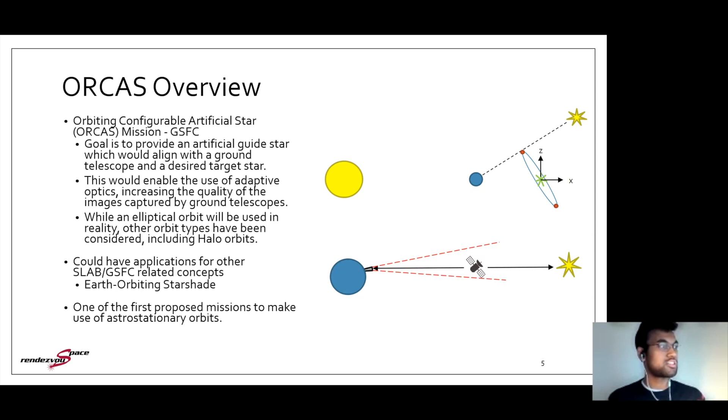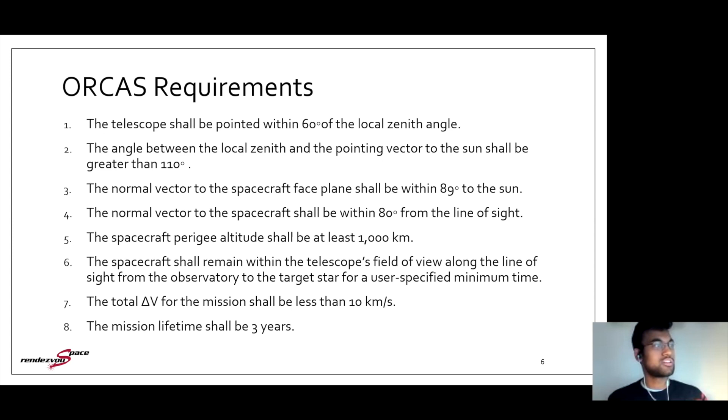So this brings me to my problem statement, which is actually a dual statement. It's first, how can we transfer between halo orbits at the optimal cost over the course of a mission's lifetime, while also viewing the most targets possible along each orbit.

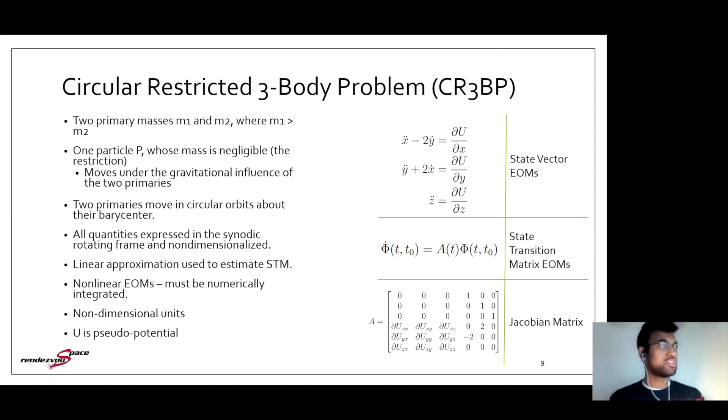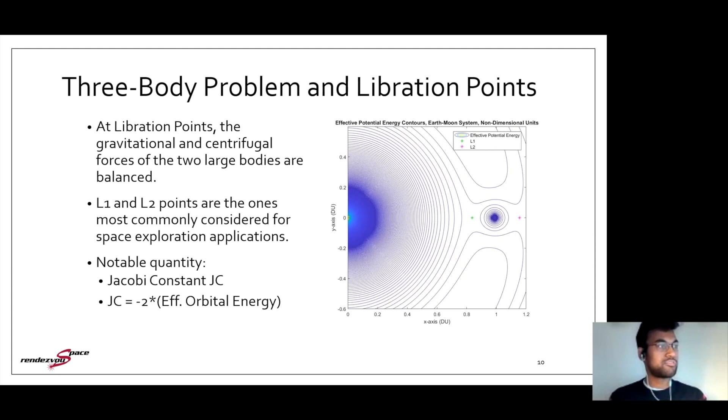But one of the benefits of the three-body problem formulation is it reveals the existence of libration points, which are these equilibrium points in the synodic rotating frame. And the L1 and L2 points in particular, which are seen on this image, are the ones most commonly considered for space exploration applications. And in the case of my work, I'll be using the L2 point. And one notable quantity, just to quickly cover, is the Jacobi constant, which is a scalar of the effective orbital energy of a particle in the three-body problem, and that'll come up later.

Another key concept is the halo orbit family. So there are clusters of halo orbits that form about each Lagrange point. So in this presentation, we'll be looking at transferring between halo orbits within the same family.

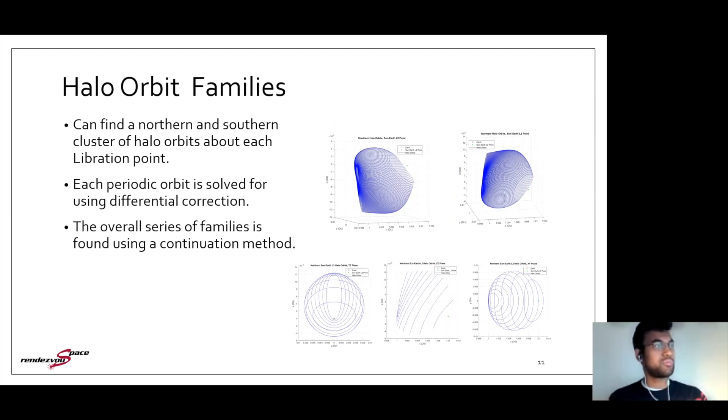And one last background concept is invariant manifolds. So these spiral off towards or away from halo orbits naturally due to the dynamics and can be used to generate zero cost trajectories because a spacecraft can divert onto them just by a small perturbation.

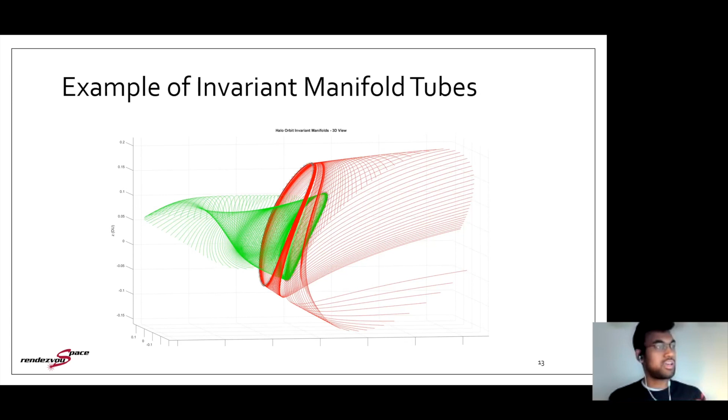And this image shows the manifold tubes emanating from two halo orbits. The green is a stable manifold tube where all those different trajectories are spiraling towards the halo orbit, and the red is the opposite, the unstable manifold tube. All those trajectories are taking you away from the halo orbit. So with that background knowledge covered, we'll now delve into the state of the art.

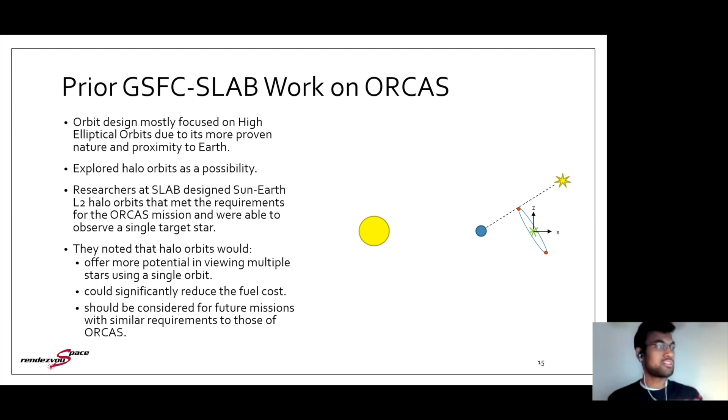As I mentioned, Goddard and SLAB had collaborated on ORCAS and explored halo orbits as a possibility. They did design halo orbits that met the requirements for the ORCAS mission to observe a single target star, and also noted that halo orbits would offer more potential in viewing multiple target stars and could reduce the fuel cost. So they could offer many benefits even if they wouldn't be used immediately.

There's been some work done on halo to halo transfers. Johnson and Howell, as well as separately Gomez, developed different methods to switch between orbits in the same family. And also there's been work done not to transfer within the same family, but to transfer between different libration points or from bodies such as Earth to the libration point using both invariant manifolds and shooting methods.

Then another important method to cover is modal constant decomposition. Modal constants and integration constants are used interchangeably, but I'm going to use modal constants just to avoid confusion with other acronyms. So in SLAB, Guffanti published work on using integration constants as state variables and showed how the variation of parameters method can be generalized and used for applications such as relative orbital motion and multi-agent control.

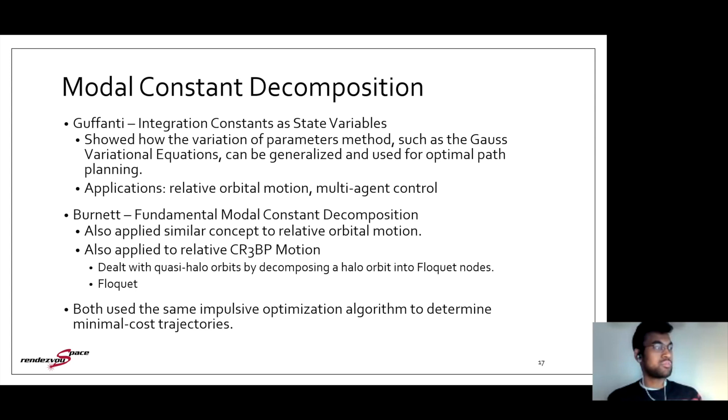And similarly, Burnett at UC Boulder applied a similar concept to, again, relative orbital motion as well as relative three-body orbital motion. But neither one applied it to absolute three-body motion, which is the focus of my work. And both, first Guffanti, then Burnett, used the same impulsive optimization algorithm to determine minimal cost trajectories in MC space.

So now I'll get into my own contributions. I had some initial attempts to find transfers using invariant manifolds, then manual iterations, single shooting methods, and constrained optimization that had some pros and cons. But the most fruitful work I did was adapting that modal constants process that I just mentioned. So there's four main steps.

First, we separate the non-integrable differential equation, so something like the three-body equations of motion, into an integrable and perturbative part. Second, we derive fundamental modal solutions to map the modal constants to the original variables and make the modal constants our new state variables. Then we can incorporate control maneuvers as perturbations and solve for an optimal control path in MC space.

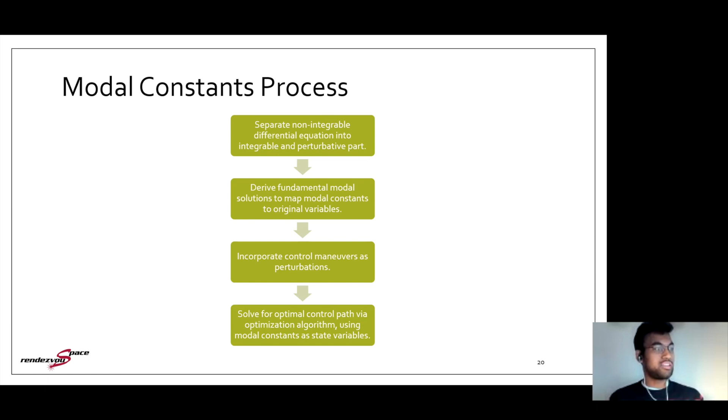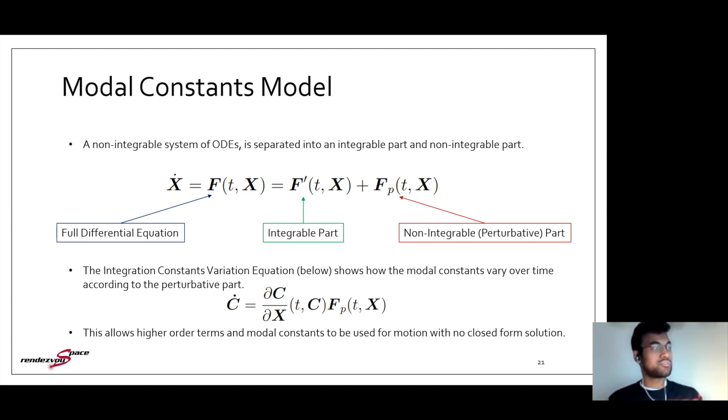So this illustrates that first point where we take a differential equation and separate it into its integrable and non-integrable parts. And then the constants themselves will vary over time according to the non-integrable or perturbative part, which is the ICV equation shown there.

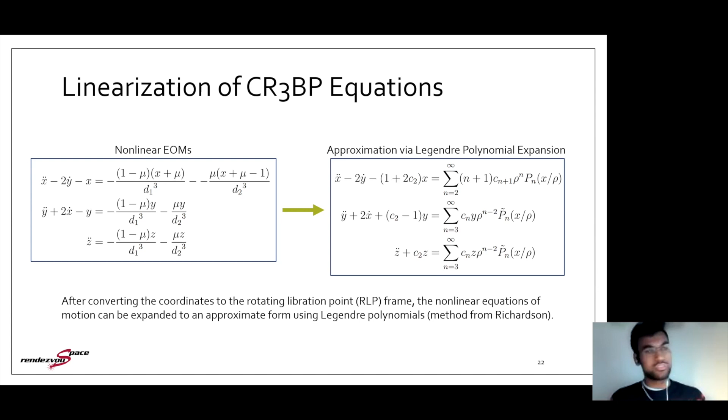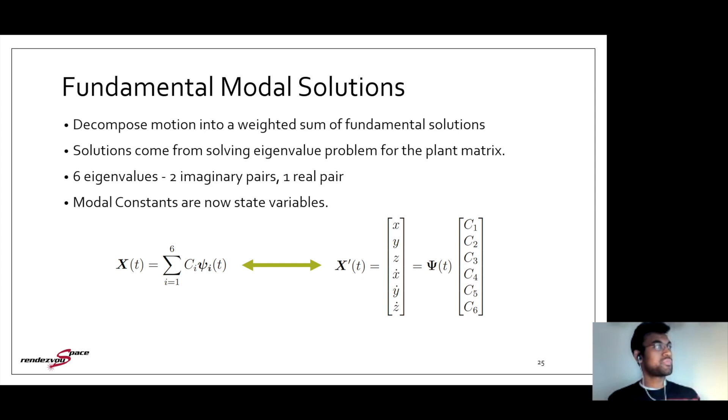So then once we have that, we can decompose the motion into a weighted sum of fundamental solutions by solving the eigenvalue problem of the plant matrix. So we find our fundamental solution matrix psi, and our state variables are now the modal constants, which is the capital C vector there. And there are 6 eigenvalues, 2 imaginary pairs and 1 real pair, and those become the eigenfrequencies.

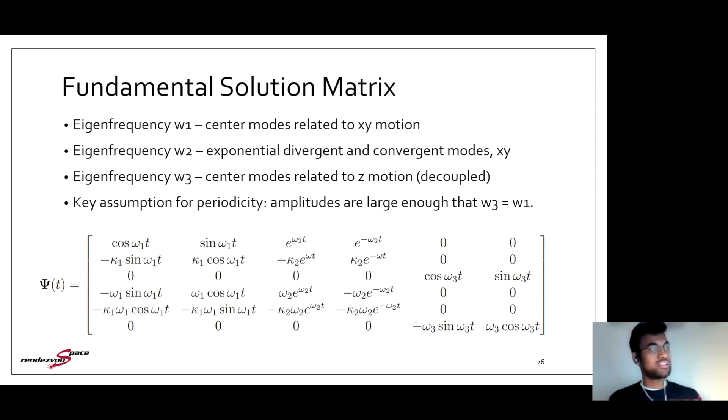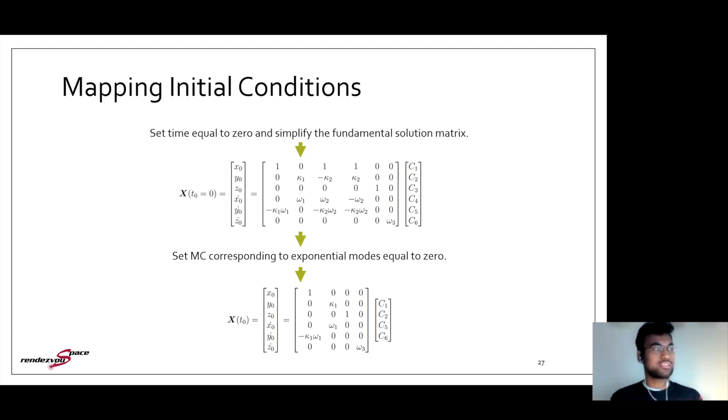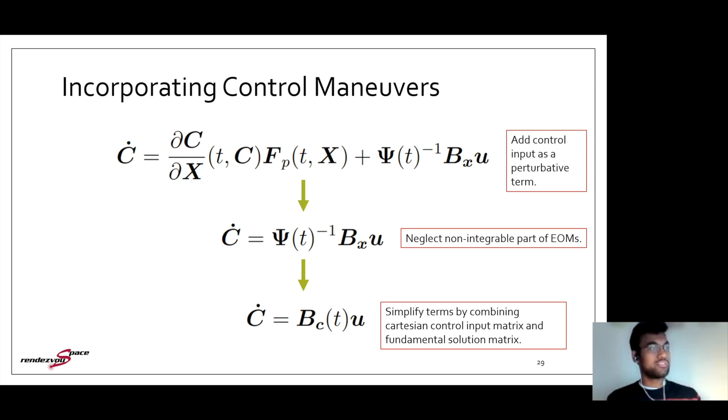So now we can incorporate control by adding it as a perturbative term. And then going forward, if we neglect the non-integrable part of the equations of motion just to simplify it and model it more efficiently, then the modal constants will vary solely under the influence of control inputs, which allows us to use an impulsive optimization algorithm based on the principle that each halo orbit will have its own set of modal constants. And so if we want to bridge the gap between those two sets of modal constants, we can do that using the control inputs while still minimizing our total delta V cost.

And so the optimization algorithm is grounded in reachable set theory, and this is the optimization algorithm that I referred to that Guffanti and Burnett had both used in their works. We have 2 convex sets, one for the control inputs and one for the MC variations, all based on the cost J.

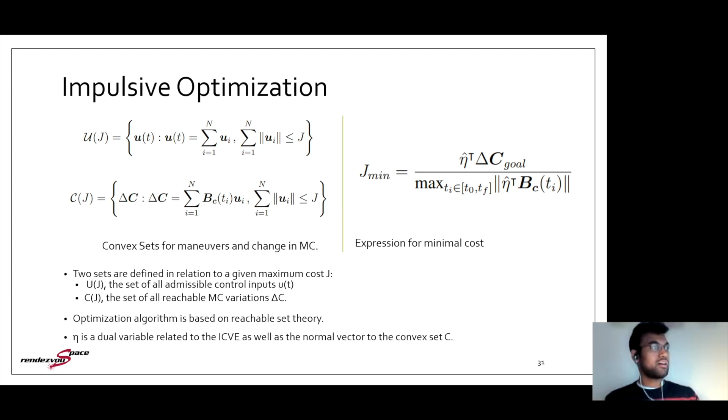And that yields this equation on the right for the minimum cost J, which is a function of the variable eta, which is a dual variable related to the integration constant variation equations, and it's also a normal vector to the convex set C at the point where the goal MC change is found. So the impulsive optimization algorithm itself has 4 steps. First, to solve for that optimal value of the variable eta.

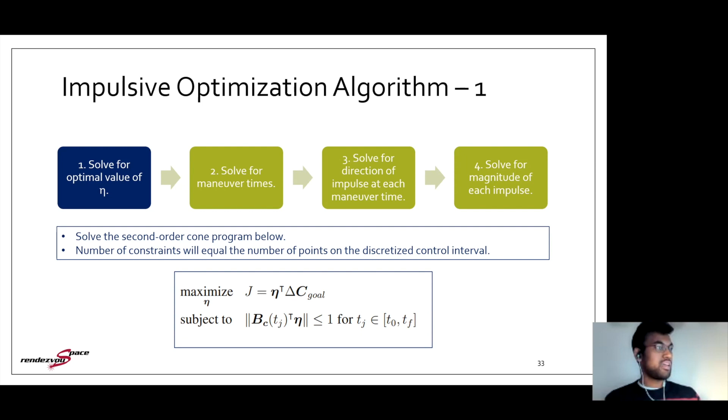Then we can solve for the maneuver times, then the direction of each impulse, and then finally the magnitude of each impulse. So we solve for eta using the optimization setup below; I used a CVX solver for this. And then the remaining steps can just be solved linearly. You don't need optimization software.

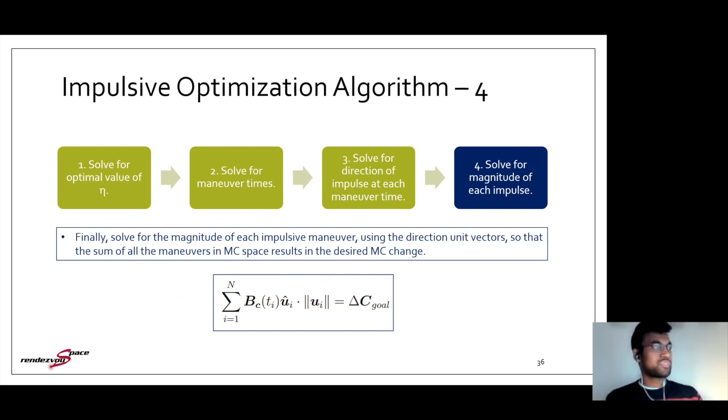And as I said, we solve for the times, then the direction, and then the magnitude. And we end up with the different maneuvers we need to change between halo orbits. So here's just an example of how that would play out, where we have two sets of modal constants. We define a control interval, and we can get the maneuver times and the maneuver cost and sum it all up after using the solver.

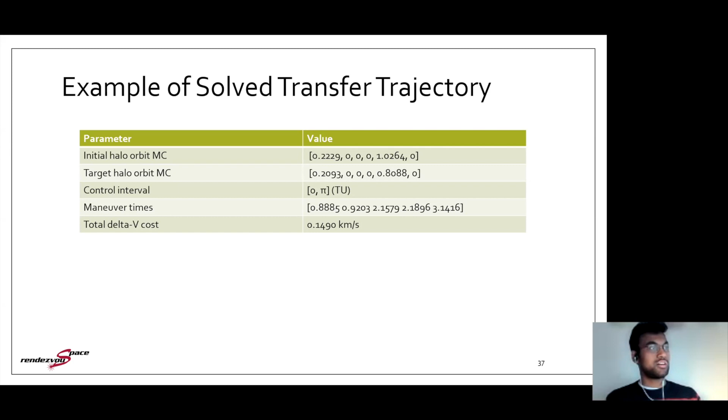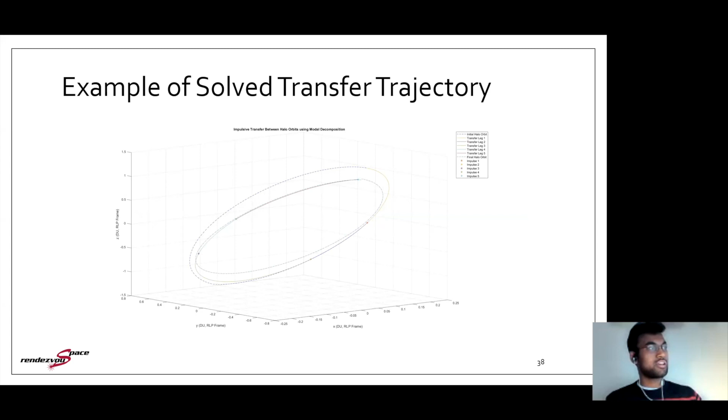Here's what that trajectory looks like. You can see the initial halo orbit, the target halo orbit, and the legs of the transfer trajectory in between, connecting them.

So now, putting the modal constants work on the back burner for a minute, I'm going to talk about another thing I developed, which is a method to find the lower and upper bounds using that Jacobi constant I mentioned earlier. Each halo orbit has its own Jacobi constant, its own effective orbital energy, and you can derive upper and lower bounds for the cost to switch between the halo orbits based on that unique

characteristic. And here I ran several halo orbit transfers through the modal constant solver algorithm, as well as the Jacobi bounds method. And you can see how, number one, the solver is within the bounds and is much closer to the lower bound. So it is doing its job to find a near optimal cost. And more importantly, they follow the same trend, which shows how the lower bound can be used to sequence orbits, even if it won't find the exact magnitude.

And then moving on to a different topic, which is the second part of the problem statement I defined earlier, which is to view multiple targets on a single orbit. I basically did this by generating a grid search based on the different parameters for halo orbits, their position, and also the epoch time that the orbit would start, since we're dealing with the inertial frame now when we're talking about viewing targets. And I refined the mesh of that grid until it produced an optimal answer.

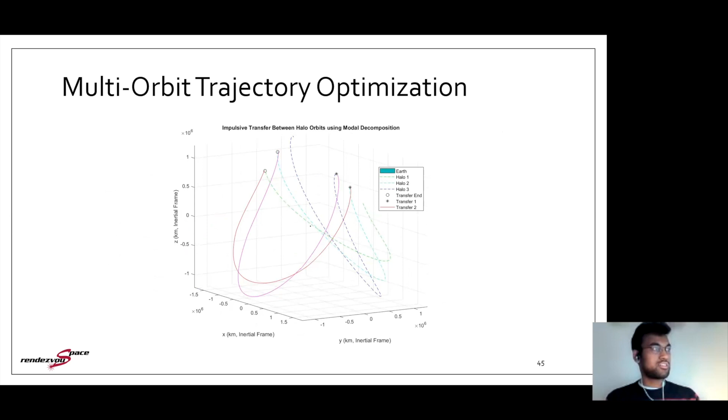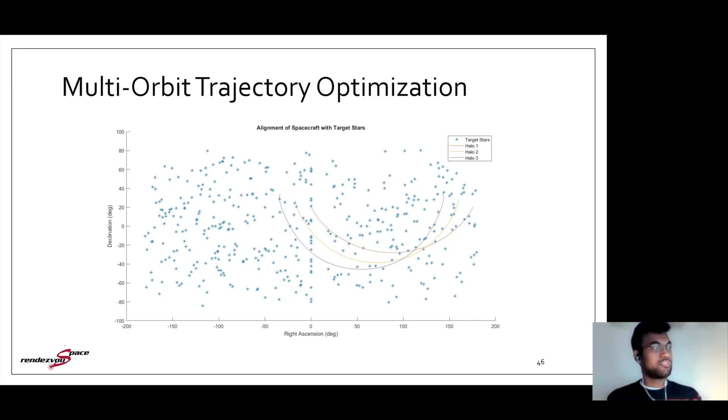This is in the synodic frame, and you can see the same trajectory expressed in the inertial frame, with Earth at the very center there. This is the ECI frame. And then finally, in the viewing plane, with right ascension and declination, these are the halo orbits plotted on there. Like I said, I'm still working out some of the kinks of this method, which is why the transfers aren't plotted on here as well. But overall, it holds a lot of promise for putting together a fully combined trajectory.

So to wrap up and summarize, I've shown how CR3BP orbits could be promising, especially for projects like ORCAS, and demonstrated how modal decomposition, grid search and the Jacobi bounds can all be combined to create an optimal multi-orbit trajectory that can find which orbits view the most targets and the optimal way to transfer between halo orbits. And of course, this shows how algorithms designed originally for relative motion can be applied to the circular restricted three-body problem and potentially vice versa.